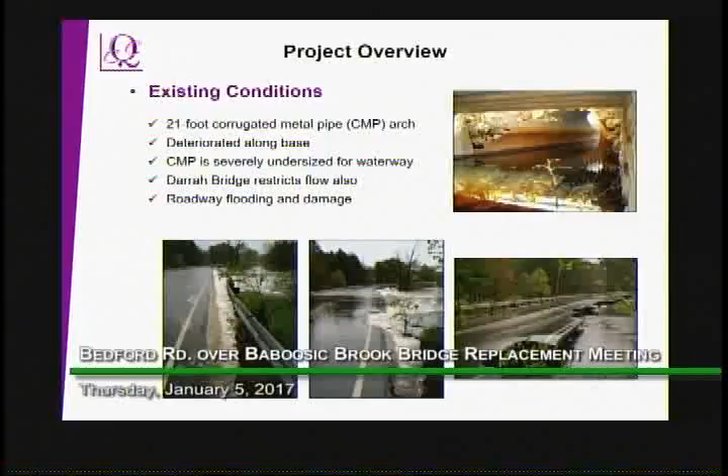The CMP is severely undersized for the waterway. If you look at the flood photos, essentially the water comes up and over Bedford Road, and it's done it several times. The Darrah Bridge is right upstream of this bridge, and it also restricts the waterway opening. If you look at the stream alignment, you can see the Bedford Road Bridge is a corrugated metal pipe, abbreviated the CMP. You'll see the Darrah Bridge, which is right upstream, and then you'll see the area where the roadway overtops.

Our purpose for this project basically is to be able to provide safe year-round vehicular passage on the Bedford Road. The need is basically because the corrugated metal pipe is undersized and it's deteriorating, and they've had several roadway closures and roadway damage in the past.

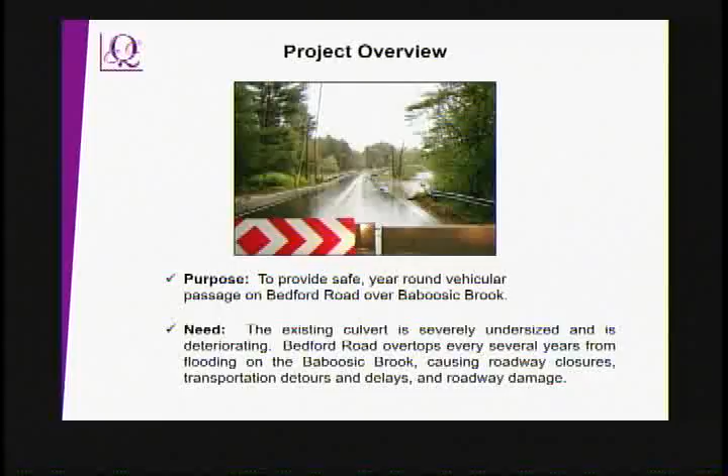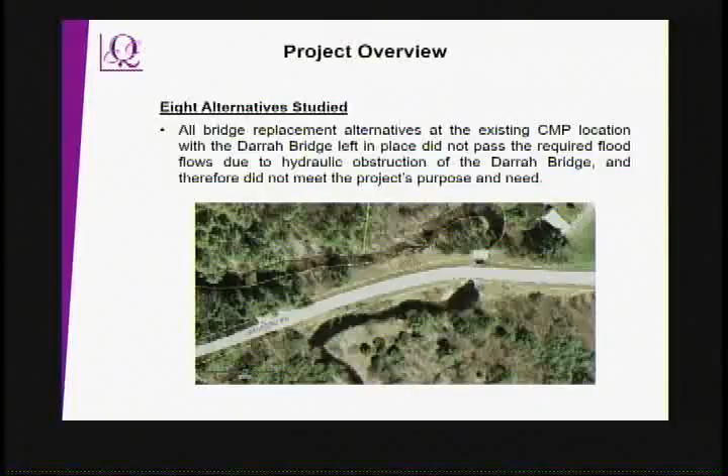We studied a number of alternatives for this bridge replacement project, 8 of them. Several of them, probably about 4 or 5, included keeping the Darrah Bridge in place. All of those alternatives indicated that the waterway could not pass the 100-year or 50-year storm or meet any DOT criteria. So it would not meet the purpose and need if we leave the Darrah Bridge in place and replace the Bedford Road Bridge at that location.

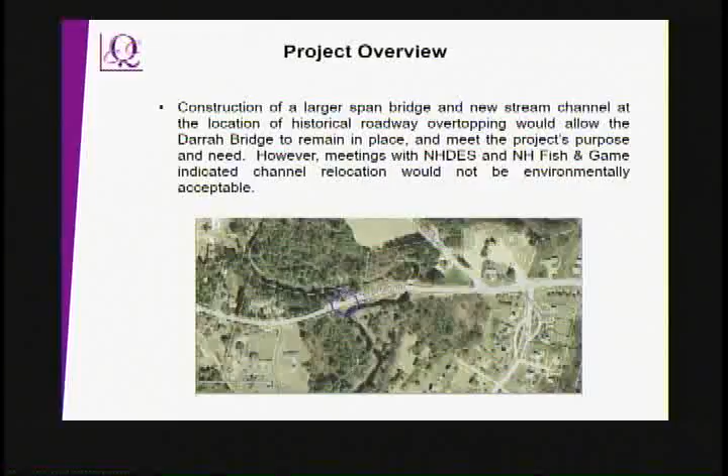There was one alternative that we studied where, where the blue circle is, we would cut through the roadway and make the stream bed go in that location and eliminate the oxbow or leave it in place, but it would not act as your main channel. We had meetings with the DES and Fish and Game, and they essentially said that environmentally it was not the proper thing to do and it would not be acceptable. Some of it was because of stream transport, sediments and velocities and degradation to the stream and water quality.

So the alternative that was our preferred alternative is actually replacing the Bedford Road Bridge, the corrugated metal pipe, with a 90-foot span bridge. And that's what is required to pass the 50-year storm with some clearance and the 100-year storm as well. And that also relies on some of the bridge replacements that have already started downstream of this bridge.

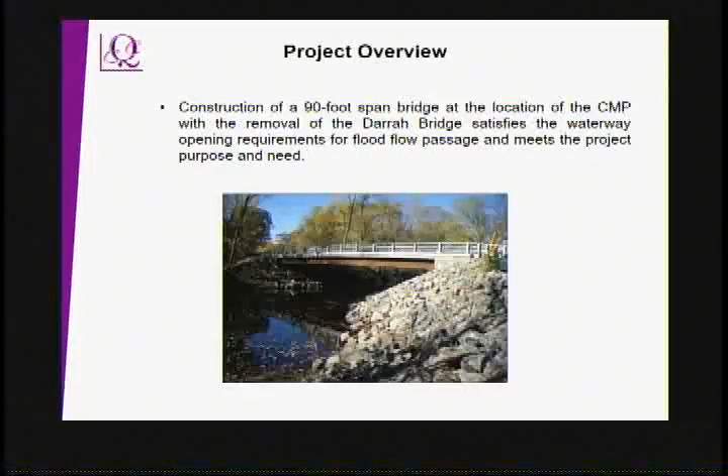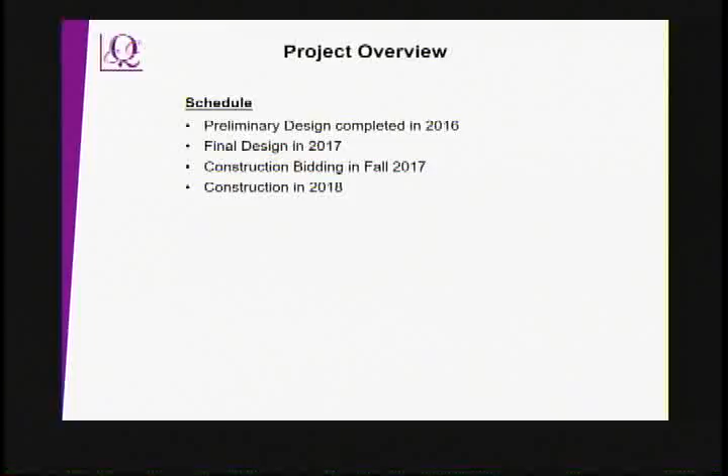Our schedule: we completed the preliminary design in 2016. We're doing final design right now, and we're proposing to bid it this fall and construct it next year.

Now we're here today to talk about the Darrah Bridge. The one that is there right now is not the original bridge. It was originally built sometime in the mid-1800s, and it was named after a local farmer. Then it was replaced in what they think was 1923, that era, with beams and concrete encased beams. The reason this bridge is considered significant is that there are only a few left in existence today in New Hampshire. And the area of significance is engineering.

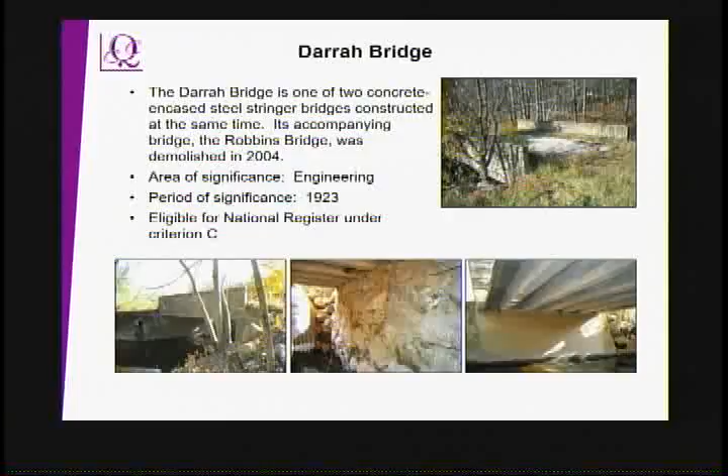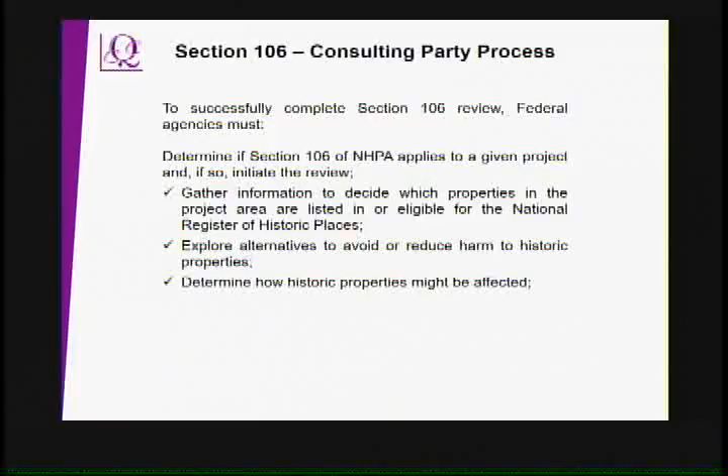So to complete the Section 106, we start out by going through a process. As the check marks indicate, we already gathered information on which properties are affected. And yes, the Darrah Bridge is eligible for the National Register. We explored alternatives to avoid or reduce the harm to the bridge, and that was the alternative I described where we would reroute the stream. And we determined how the historic properties might be affected. In our case, what we're proposing is removal of that bridge.

Now what we have left to do really is to seek public input to get ideas. What would you like to have for mitigation for the adverse effect of removing this bridge, relocating it, all kinds of ideas. We want to hear from the public. We don't want to place ideas in your head. We want to hear from you what you would like to be done as mitigation.

Right, and the Darrah Bridge is about 25 feet in span. The culvert is 21 feet in span, so the second we open up the culvert to be what it should be, the Darrah Bridge controls the flow, and it will force the water back up over the roadway. As part of the project, we are actually raising the roadway as well as putting in the larger span bridge. But it'll still flood. It won't be raised enough.

The roadway will not flood after our project under the 100-year storm. Higher than the 100-year storm it may still, but we are raising the roadway. We're opening up the waterway, and we're removing the Darrah Bridge so that we can construct the channel through the new bridge. Thank you.

Hi, my name is Dan Memis. We're one of the abutters, immediate abutters to the bridge, and I could answer several of your questions. The brook flows from left to right on top, cuts under the road and comes back down.

Okay. My question is the Historical Commission. They have the final say on this, or, you know, you're saying we will discuss it, we will present and ask questions, but it has to go through them for the final. It does have to go through them, but part of the process is your ideas. They do not tell us what we can and cannot do. They're looking for ideas from the public as to what is an appropriate mitigation. They may have some ideas of their own that they may share with us, and they are also a consulting party. Okay.

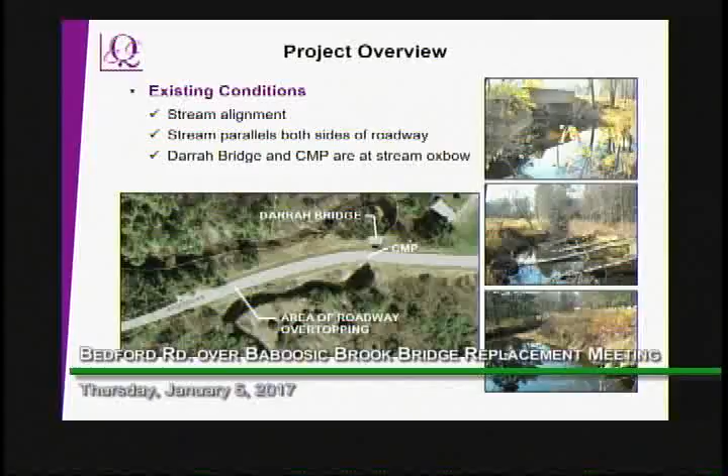Mr. Cota? Yes, what's that going to do to the duplex as far as this bridge here and the temporary road in the back of the duplex? The back of the duplex, the white house, the building you see. What it will do is it will come right back in. The idea is we're not going out onto what I believe is your property. There's also a 24-inch CMP that runs through that area. It basically comes back before that, doesn't stay on that alignment, because we've got to get back and straightened up before it gets onto Pearson. So it's going to be elevated? There'll be a slight grade change.

Yeah, we assume the temporary bridge will be somewhat elevated a little bit, but they can't go up very high because of their proximity to the Baboosic Brook. We can't put fill in it for a temporary roadway. So it's pretty much going to be at grade and scoot back up to get onto the intersection of Bedford Road and Pearson.

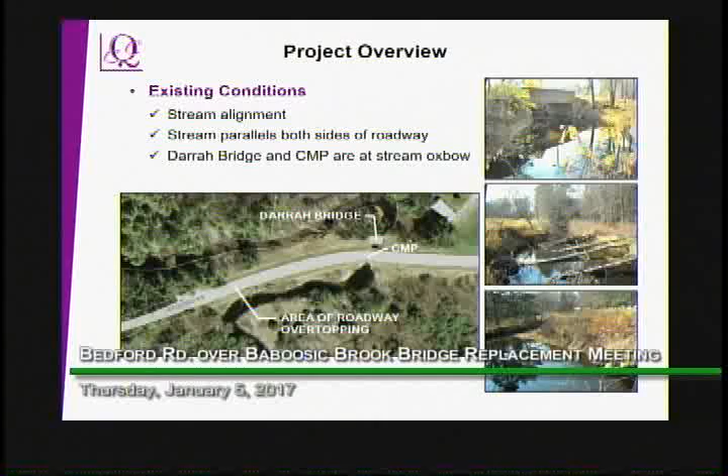What's the construction of the stream bed going to be once the bridge is in? Approaching the new bridge will be the natural stream bed. We will cut back the banks where the Darrah Bridge is, and put stone fill or riprap that would stabilize those banks. And then through the structure area, because we're taking out a corrugated metal pipe, we're actually going to run our riprap down the banks under the bridge, similar to the photo I showed right there.

And you'll have a sloping grade in front of the bridge, and then that riprap will go through the channel, but we will cover the top of the riprap in the stream bed with a natural stream bed. Because we're excavating out, we'll have the contractor save that material and put it back on top of the stone so that the natural stream bed will be continuous.

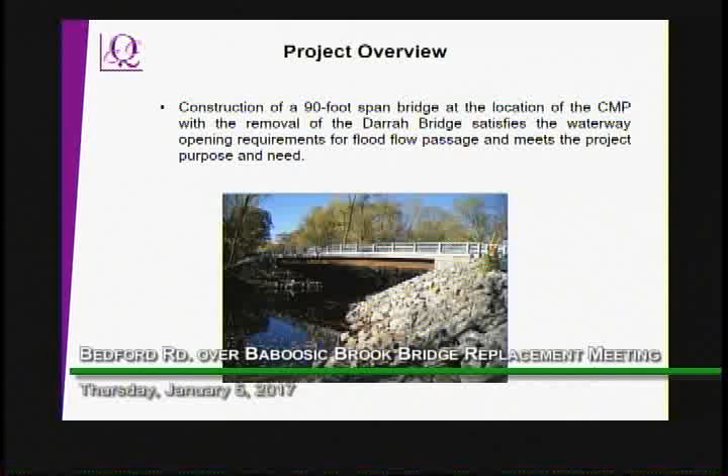Mr. Cota? Yes, what about the 36-inch pipe, just downstream? The 36? On the north side of the old bridge. There's a 36-inch pipe down through there. Yeah. Across Pearson Road. It comes down Pearson Road, right out just before the bridge. We are not interfering; our scope of work doesn't go anywhere near the 36-inch.

The 24-inch corrugated metal pipe that currently outlets in the head wall for the Darrah Bridge, or I should say the retaining wall that comes up towards your property. Since it's corrugated metal pipe and it's subject to the same conditions as the bridge on Bedford Road, it just corrodes and rots out. We are proposing to replace that culvert. Leave the head wall there? No, the head wall's coming out.

Well, there'll eventually be an easement with you, or some sort of instrument, so we can get in and take that whole head wall out and grade that back a little bit and make it much more attractive. The head wall is integral to the Darrah Bridge, so if we take off the Darrah Bridge and only leave a piece of it, we don't have a full set of plans for that. We can't comment on the stability of it. Last thing we want to do is walk away and then have the thing fall over. So it all becomes part of the removal process.

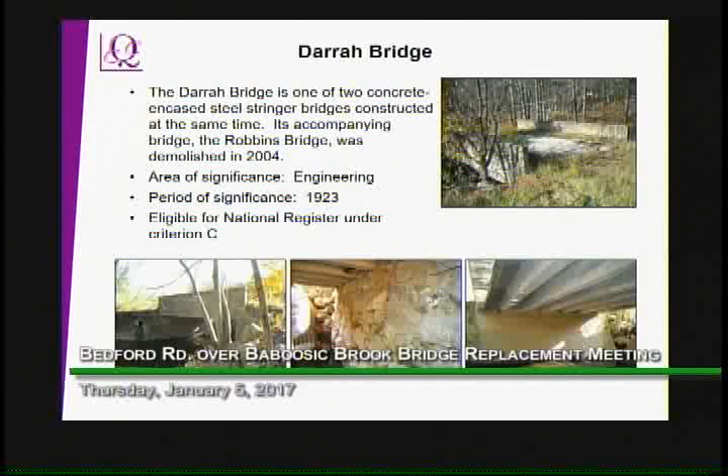Well, we thank you for your interest and your comments, and we'll put them together as we move forward with the process. The DPW will be very much aware, and they're a participant in this also, and hopefully we'll have a very successful project, albeit a year long. I apologize for that, but that's what it's going to take, and we'll get this straightened out and cleaned up.

Thank you. And there is also a comment sheet, so if you think of something after the meeting, please email me or fill out that comment sheet and mail it in. We'd like to hear from people. Or you can get in touch with us too.